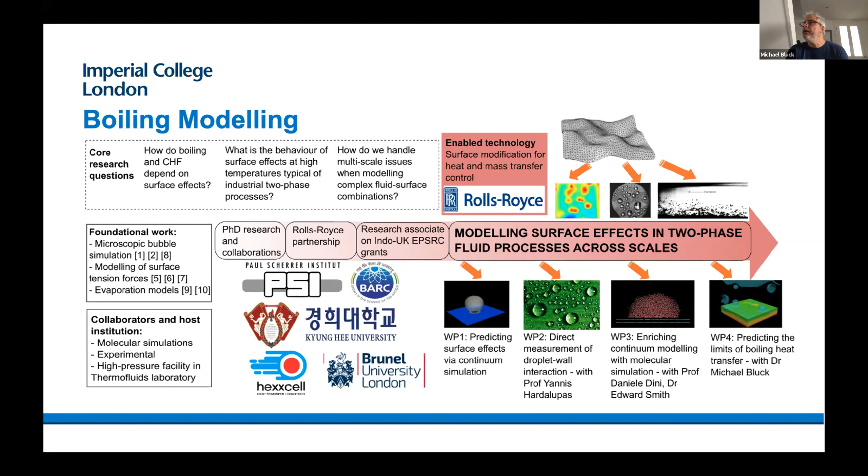So we're really coupling the materials almost with the fluid processes. So that's a big and growing area that builds on a lot of our boiling work that we've done over many years. UQ, uncertainty quantification, that's another big activity that covers quite a lot of what we're doing now and is growing.

Gaussian process regression methods, Bayesian calibration for determining constants. Whatever we're doing, certainly unless we're doing DNS, then constants are involved. So determining those and quantifying uncertainties in turbulence models, and a whole host of work involved in UQ. I'm only picking one or two of the things. I'm not going to go through a whole list.

Reduced order methods, again, if we haven't got vast supercomputing resources, then our approach, if you like, this side of the pond, is looking at reduced order methods, particularly POD-based methods, where we take full order models and we do a proper orthogonal decomposition to reduce the cost, with some limitations, obviously, and we've done a lot of work on that in collaboration with a group in Italy, Trieste.

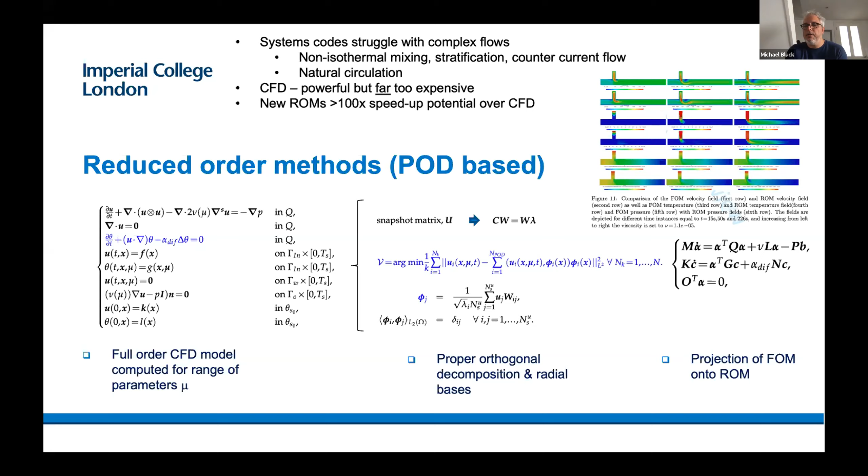And I think I'll end it there. There are obviously others, but I think 5 minutes. I think that'll do, if that's okay.

Yeah, thank you, Mike. Okay. Yeah, you can stop sharing. Then the next one can share his screen. The next one is Marco from Leeds University. Okay. Good morning, everyone. Let me share my screen. Can you see it? Yeah.

Okay. So we'll try to give a brief overview of the thermal hydraulics activity at the University of Leeds. First of all, that is part of the Nuclear Engineering Group, which is based in the School of Chemical and Process Engineering, but is a really multidisciplinary team that has expertise other than in thermal hydraulics, also in decommissioning, decontamination, waste management, and in advanced fuel cycles, and has been funded with several grants from the UK and also Europe, present and past.

So with regards to the thermal hydraulics activity, mostly we use computational fluid dynamics to advance our modeling capabilities in different aspects of nuclear thermal hydraulics, and our main expertise is in multi-phase flows, in particular gas-liquid, but also gas or liquid with solids, and specifically also on bubbly flows. And I will show some results on those. Then the other area in multi-phase flows we really focused on is boiling, and also we apply CFD to natural convection and passive safety systems in the context of nuclear thermal hydraulics.

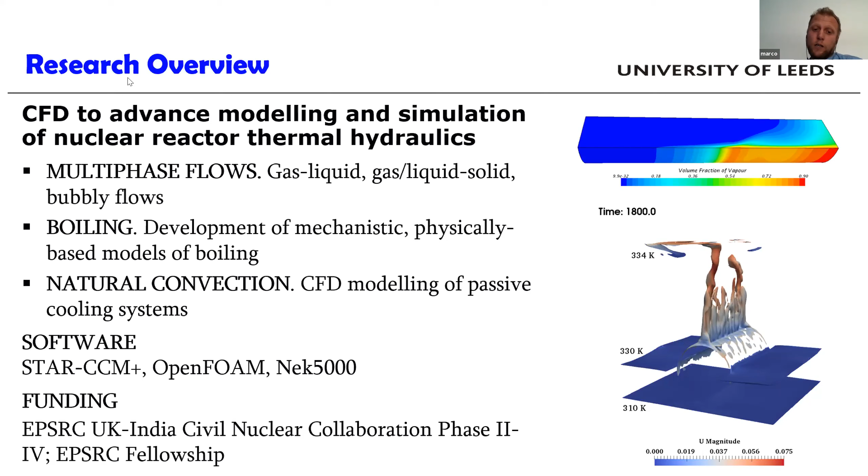The software we use are mainly STAR-CCM+, OpenFOAM and Nek5000. Those are the software we are experienced on, and the activities have been funded through different EPSRC grants, mainly on the UK-India civil nuclear collaboration, and also the fellowship that I currently hold.

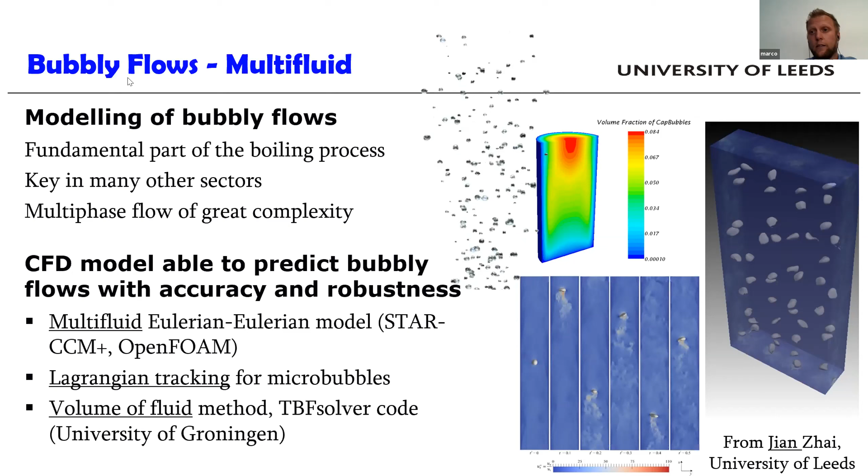So with regards to bubbly flows, we are interested in modeling those in the context of nuclear, because they are a fundamental part of the boiling process, but also because they are relevant in many other sectors where we require mixing, and that is also a fundamental part of some reprocessing techniques.

We use different techniques to model bubbly flows. We have capabilities with multi-fluid models, so Eulerian models, mainly using StarCCM+ and OpenFOAM, but also we use Lagrangian tracking, and this has been done mainly for microbubbles, and we are developing also capabilities in using interface resolving methods such as the volume of fluid, and you can see some example on the right of a single bubble rising in a channel, and also of some multiple bubbles simulation.

This is one of the recent developments. Also in the area of multi-phase gas liquid flows, the development of a generalized multi-phase model that is called GEMMA, that tries to go beyond the fact that in gas liquid flows we have multiple flow regimes, and most of the time the models at the present time are limited to some of those. So what we are trying to do is maintain the resolution of dispersed bubbles or droplets with average methods such as the multi-fluid. So it's a multi-fluid framework, and on top of those we have the resolution of the large interfaces only, more than resolution, let's say, keeping the interface sharp and trying to apply the right closure relation.

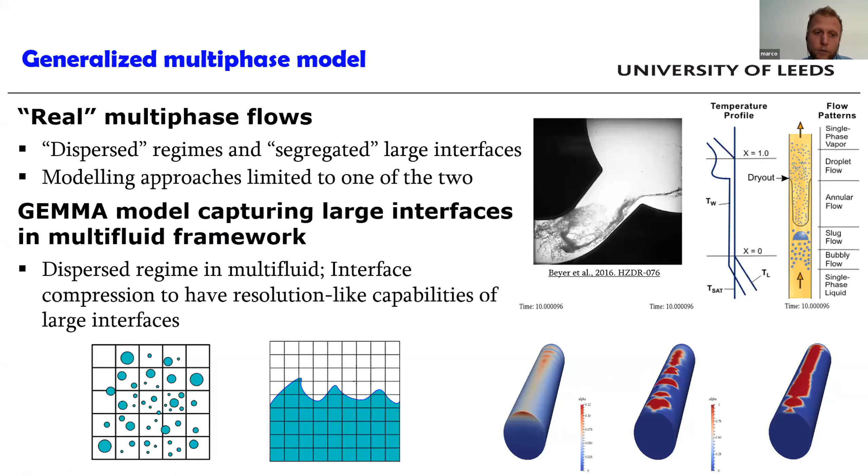Other than that, we had many activities in boiling. Again, the interest is, of course, the prediction of boiling heat transfer and the CHF in the reactors. What we do is we try to develop more physically based models of the boiling process, in particular for the growth of the bubble and the departure, and implement those in CFD, and have simulation of boiling flows in nuclear thermal hydraulics.

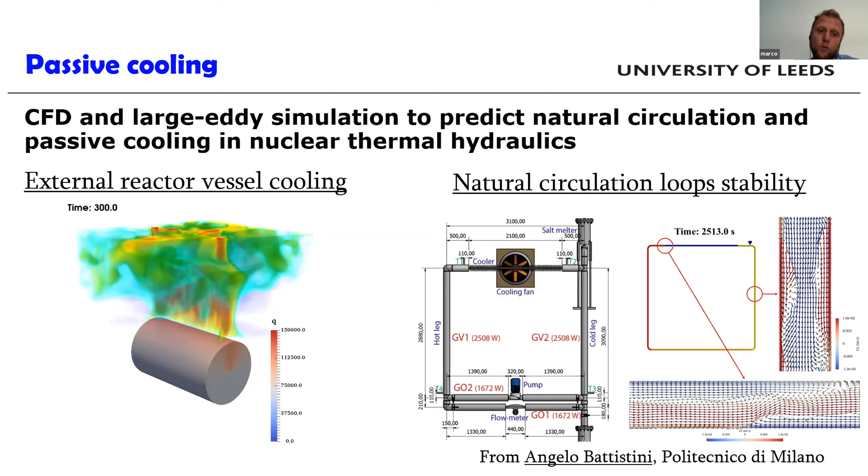Some of those are in natural circulation, and the other area we are active on is passive cooling. So the use of CFD, mainly coupled with large eddy simulation, to predict passive cooling and the effectiveness of passive cooling in nuclear reactors. You see two examples here, the cooling of the outside of a cylindrical vessel in a water pool in case of core melting, and also on the right, the simulation of a natural circulation loop with distributed heat generation. So here the focus is the molten salt reactor, again done with large eddy simulation. This is on the right, single phase instead. On the left, in the external reactor vessel, we also had some boiling on the outside surface.

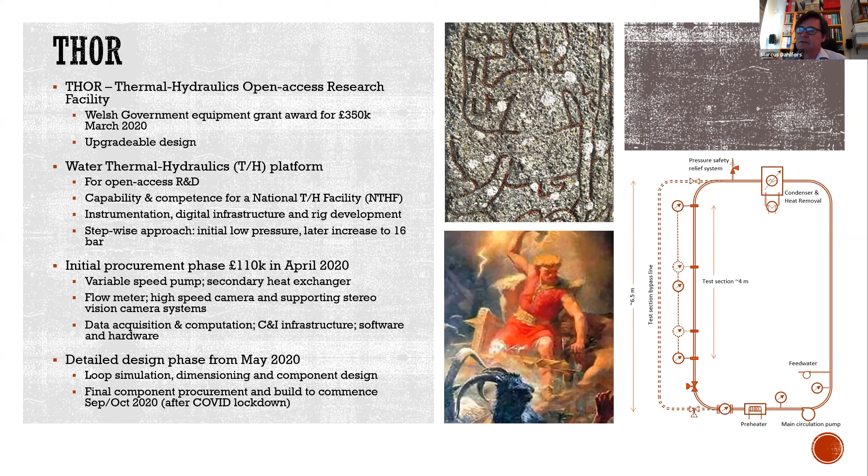But I want to turn my focus to a proposal due to the recent National Nuclear User Facility call, the phase 2A of it. We have developed an upgrade proposal. So Thunder, which is the Thermal Hydraulics Upgraded and Enhanced Research facility. This would basically build on a similar concept, but where we would take up pressure to 80 bar with a very special feature of a pressure chamber that can accommodate large window access to thermal hydraulics experiments inside of it.

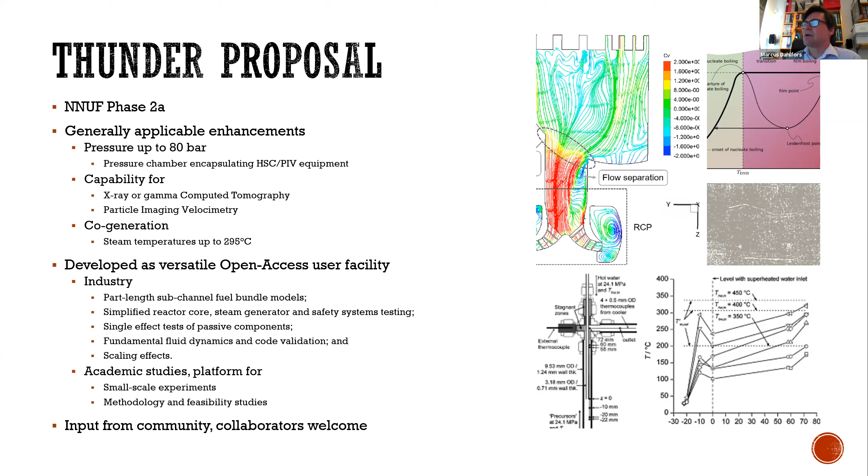For geometries of quite significant extent, we are looking to maybe a 2.5 meter high and 1.2 meter pressure vessel where we would have pressure equilibrium and therefore could run thin windows or thin wall geometries where you could apply CT techniques, computed tomography. At 80 bar, we would reach 295 degrees. I think you can figure out what kind of potential experiments you could do.

This is the basic scheme of the loop that we are proposing, and especially the system here with the pressure tank and the pressure equilibrium condenser is quite bespoke to this. It requires an inert atmosphere of nitrogen to be run. It has generated a bit of interest, and I've spoken to some people within the UKAEA SIG network who are also interested. There are also other complementary concepts out there for this call, and many look interesting, but this is ours, and if we're successful, we would obviously look for collaborators and people with suitable problems to test in this kind of facility.

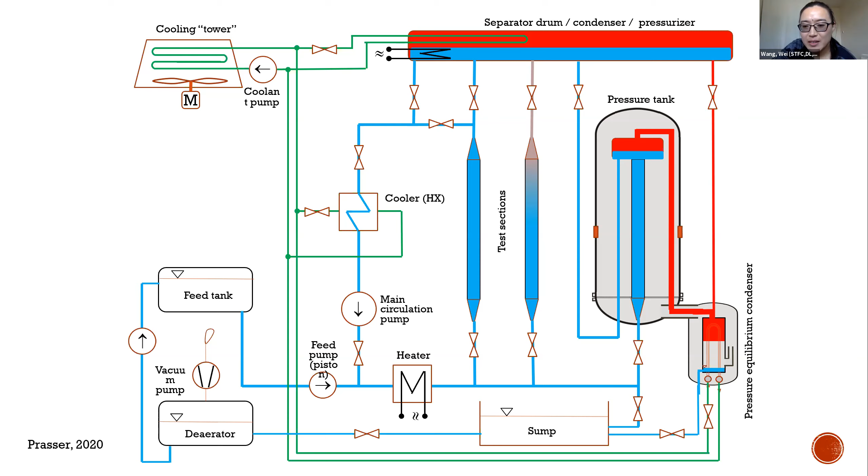How are we doing for time? Yeah, thank you. Thank you, Marcus. Okay, I'm happy with that. So if you have questions, don't hesitate to contact me later. Thank you. The next one is David Emerson from STFC Daresbury Laboratory. Marcus, can you stop sharing? Yes, I will. Just that my screen disappeared. There we go. Okay, thanks. That's fine.

Hi. Hopefully everybody can see that. Great. So I'm going to give a brief overview of the group. You've already heard from Wei about the CCP and some of the activities we're doing there around nuclear. So this is a little bit broader, around the department and some of the other work going on. We're part of the Computational Science and Engineering Division within the Scientific Computing Department. Within ours, we have four branches. We look after engineering, but we also have physics, biology, and chemistry.

All of these have a long history in CCP activity from different areas, but it gives an indication of the range of length scales that we cover, from electronic structure of matter in computational physics, lots of computational biology work that Wei has mentioned with BBSRC and MRC, and a very strong computational chemistry activity as well.

Now it only shows the first page. Okay, I have no idea why that is. It's showing full screen on mine. Maybe you have dual monitor. I can unplug the other monitor to see if that causes an issue. Can you see the second one? Yeah, I think that's okay. That's never happened before. Well, just very quickly, that's showing the various different activities. It's actually not showing very well on my screen now, which is interesting. I can only see a bit of my slide, but you can see all of it. We can show your current slide and your next one. What I'm going to do is just end it and start again, because I think it's got screwed up in a classic Windows way. Can you see it now? Yeah, that's the first page. Yeah, no, that's fine. Great, I don't know what happened there. It's never done that before in all the times I've used it.

So anyway, this is briefly going over again, just showing the length and time scales that we're operating over, from electronic structure right the way through to the macro scale, and the various sections.

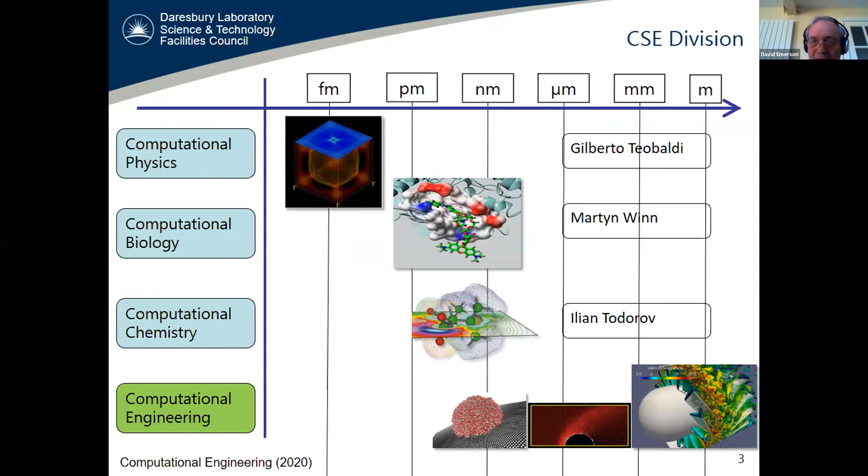These are the research topics that we're looking at. I've already run through them, but the main thing to focus on are the ones in red, which are the areas that we're working on quite extensively at the moment: Peta and exascale, and multi-physics and multi-scale.

This is just some examples of the projects we're doing. At the bottom right is part of an EPSRC project we had looking at molten salt fast reactors.

The top right is looking at coupling. In the coupling work, we've been developing the MUI - multiscale universal interface - which is a collaboration with Brown University in the US. This is an open source package for coupling based around the MPI directive, so it's very portable and easy to add to codes. There's still a lot of work to do on developing that coupling, but our intention is to use this so we can use the best code for a particular application and then couple them together.

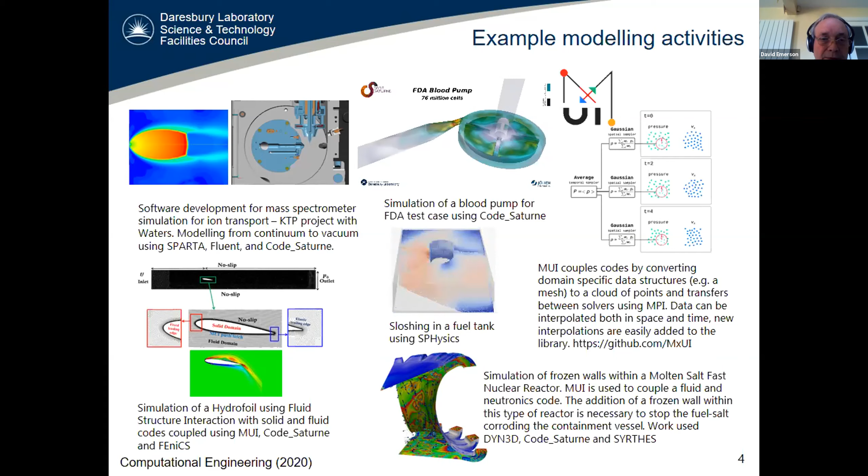Given that time is now a bit tight, I'll move on. The top left is a mass spectrometer project we were working on, a former project. There's also been some talk about fluid structure interaction, a project that just happened. So as sample projects, we have a program grant currently running.

This is looking at more nanoscale and microscale activities with Edinburgh and Warwick. There are three high-end computing consortia which are quite relevant to what we're doing here.

There's the UK Turbulence Consortium - we get a lot of our compute time within the consortium from UKTC. There's another one on turbulent reacting flows, and another looking at mesoscale modeling. Highlighted in red is the next machine, Archer 2, which I'll briefly touch on in the next slide to say what we're targeting. There are also three CCPs of relevance at the moment.

There's the nuclear thermal hydraulics, as we're at the meeting today. There's also a CCP in turbulence, looking at fundamental DNS. And there's a CCP in wave structure interaction, and part of the target there is to look at large-scale FSI type projects.

In terms of exascale, we are nowhere near as active in the UK as they are in the US. So we do have one called Excalibur, which is looking at coordinating the activities. There's a couple currently running, looking at turbulence and mesoscale modeling. One of our team, Alex Skillen and Charles Moulinec, have just had a project funded now looking at fluid structure interaction framework for exascale.

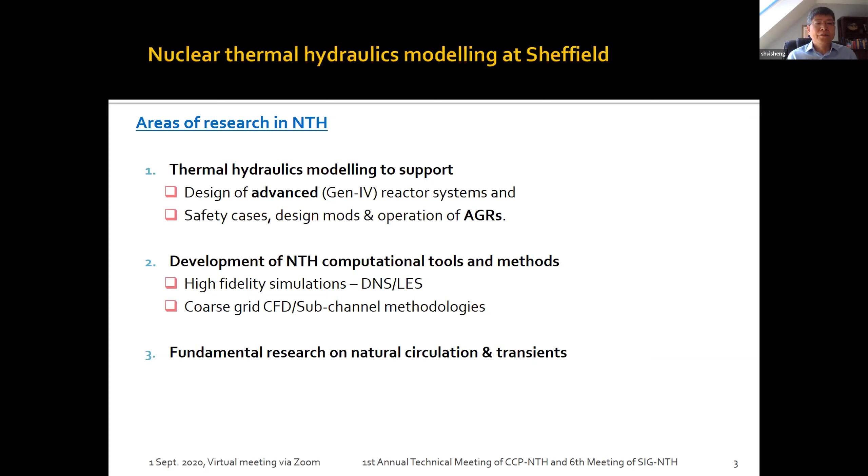So next, I'll just give you some examples of research projects currently happening within the research group in the department. The first one is on the modeling of advanced nuclear reactor designs. We're involved in 3 types of reactors: liquid metal fast reactors, SCWR (supercritical water-cooled reactors), and more recently high-temperature gas-cooled reactors.

Within the first group, we're involved in the BEIS digital reactor design thermal hydraulics, led by Frazer-Nash Consultancy. Here we've been working on aerosol dynamics in the cover gas region in liquid metal fast reactors, and more recently we focused on heat transfer to liquid metal in complex geometries, which will be discussed later on by Shuisheng.

And in the framework of the EPSRC and DOE project, we are working together with STFC and EDF Energy on safety model development and validation in the area of liquid metal fast reactors, to support activities in instrumentation technology development in the US.

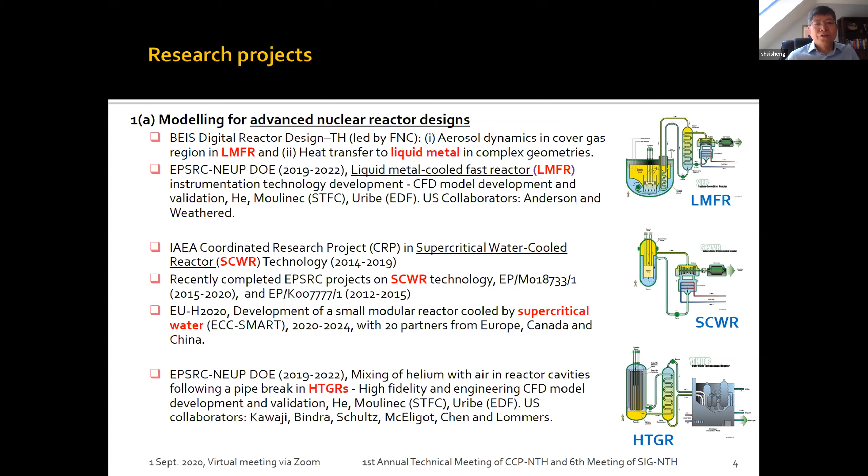Now, in the AGRs, we've been working on fuel route modeling. There are a couple of PhD scholarships which enable us to develop something quite interesting. And then in terms of the core reactor heat transfer, is something I started with, so we've been probably working with that group for over 10 years.

Then the last one, we talk about safety case. This particular one is a recent safety case which we have done a bit of work to support.

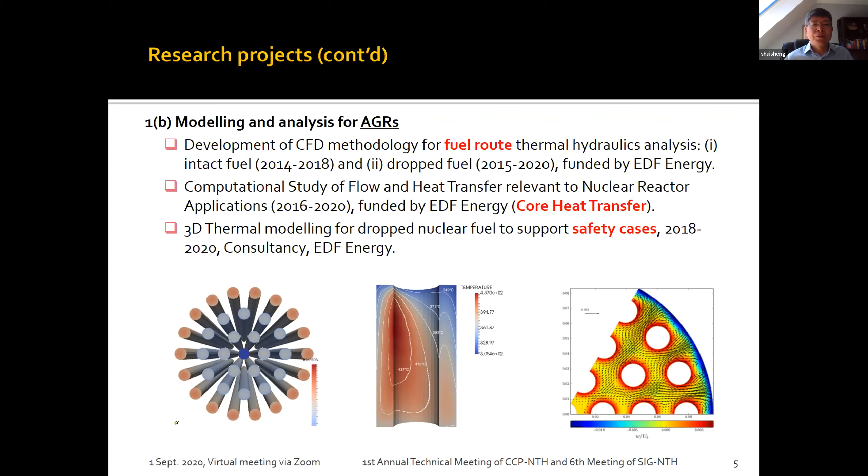This is in the area of 3D thermal modeling. But in the past, we supported various safety case development.

Now, in the area of computational tools and methodology development, as a group, we have developed a number of safety software codes, and probably that's what we want to do.

That also includes Chapsim for DNS, and obviously the main developers are Mehdi Seddighi, who is currently at Liverpool University, and also Dr. Wei Wang, currently at STFC.

And in the second item, we actually developed a 3D porous medium model called Freedom for AGR fuel bundles.

This is something we hope to use to support all the safety cases related to natural circulation, both in terms of intact fuel and dropped fuel scenarios.

And the third item on this is a development of a novel sub-channel CFD modeling methodology. This is funded by BEIS Digital Reactor Thermo Hydraulics, again led by Frazer-Nash.

And again, this will be discussed by Dr. Bo Liu in the afternoon.

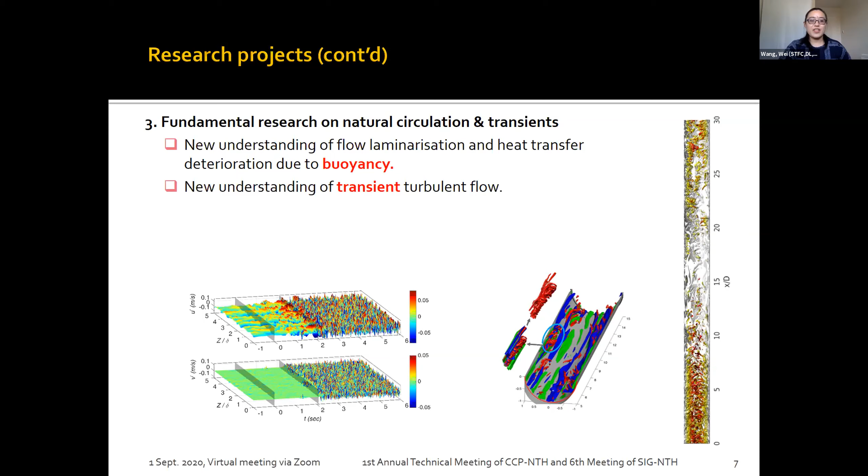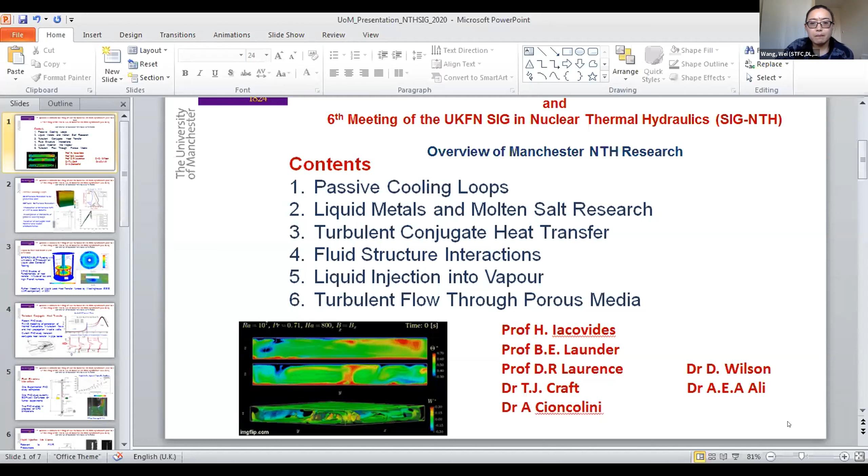Okay, can everyone see the full screen? Yes.

Okay, hello again. Over the next few minutes, I'll try and give an overview of some of the current and also recently completed research in the area of thermal hydraulics within our group.

Here, I have the names of the academics and PDRAs that currently work in this area within the group.

I should perhaps also add that at Manchester, we also have the Modeling and Simulation Center set up by EDF Energy and now being joined by other external collaborators.

We also have the Dalton Nuclear Institute, which provides and supports nuclear research right across the different disciplines. And also, jointly with Imperial College, we are a Rolls-Royce nuclear research center.

Here, I'll just quickly go through some of this list of items. It is actually by no means exhaustive.

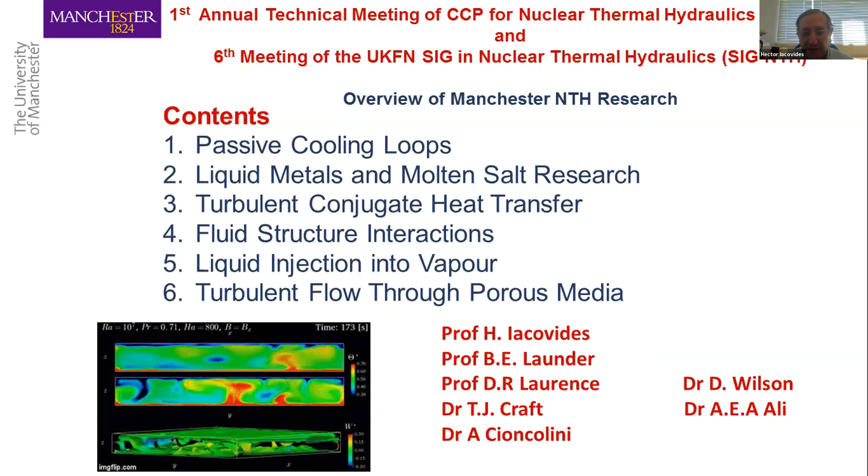I just realized, for example, that I left out some of the experimental research that my colleague Andrea Cioncolini has underway on boiling, but this will give you a flavor of what we are up to.

Passive cooling loops is an area we are quite active in. We have funding from BEIS through the BEIS Friends and Arch project, which Dr. Wilson will be

discussing further later on. We also have another PhD studentship co-funded by EDF and the University of Manchester, who will look at more fundamental aspects, starting with more fundamental natural convection flows, where the student introduced the analytical wall function

into Code Saturne, which, as you can see here, has quite a big impact on the accuracy.

He's also now looking at some of these natural convection loops, and in particular, focusing on the transients and how that can be improved by including conjugate heat transfer and also the characteristics of the heater.

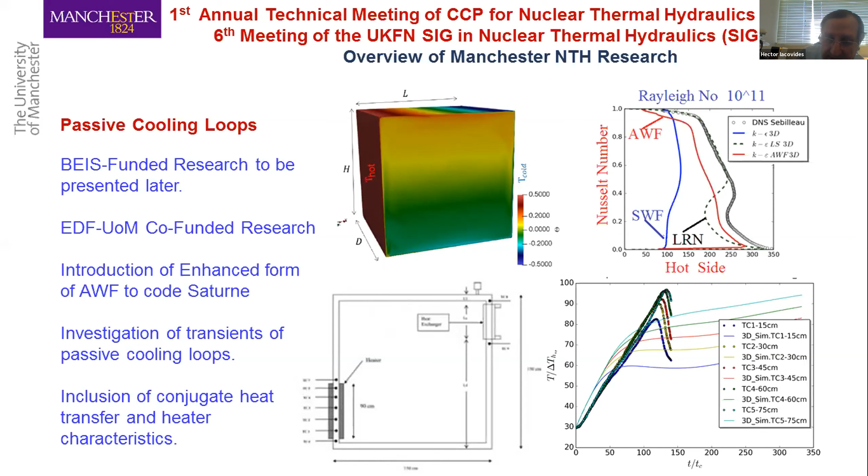Another area that we started working a lot on recently is liquid metals and molten salt research. Funding is mainly provided by the joint EPSRC and DOE grant, jointly with the University of Pittsburgh.

Here are some examples of some of the initial work we're doing to provide information to our Pittsburgh colleagues on how to design a molten lead corrosion experimental rig.

Then we'll go on to produce some high fidelity simulations of this in order to compare with their experimental data.

In parallel to that, we also have two PhD studies looking at fundamental aspects of low Prandtl and high Prandtl number heat transfer. And later on in 2021, we will start another project funded by Westinghouse through the BEIS AMR competition on

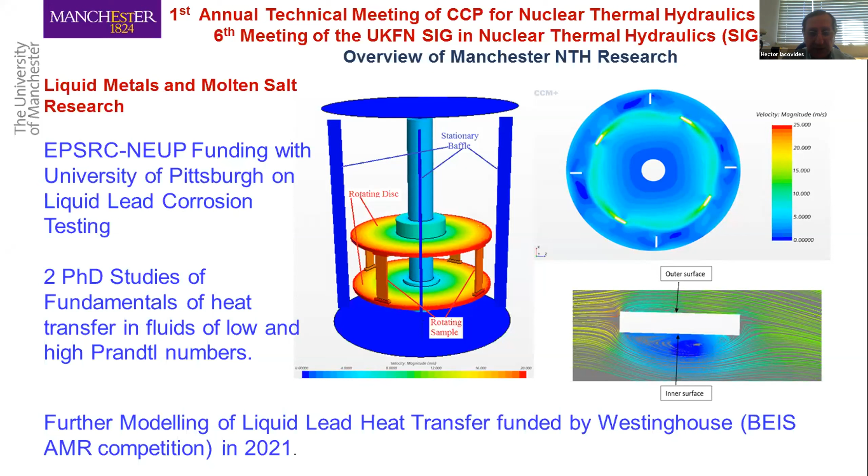liquid lead heat transfer as well.

Another area is that of conjugate heat transfer. We recently completed a PhD study in which we've been looking at the generation of thermal fluctuations due to turbulence within the flow and how they propagate into solid walls.

Initially looking at simple channel flows and comparing with DNS data. Having developed the model, more recently, we applied that to these more complex 3D cases for which there is also DNS data.

And as you can see here, it seems to be providing pretty close agreement with the DNS.

More recently, we started another PhD study looking at transient conjugate heat transfer through pipe bends.

Another area is other fluid structural interactions. What I show here is from an earlier PhD study that has been completed.

We now have another experimental PhD study co-funded by EDF and the University of Manchester. In parallel to that, we have another two PhD studies looking into developing CFD modeling for these cases where we have flow-induced vibrations when the flow is parallel to the rod, which is relevant to PWR fuel passages.

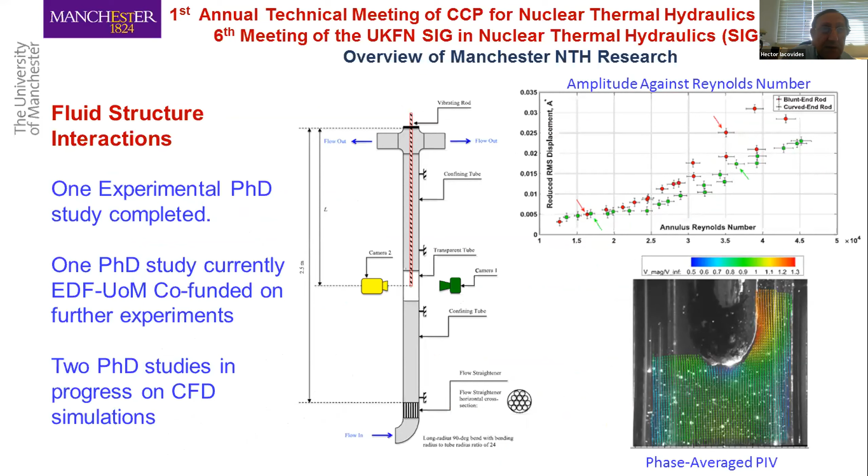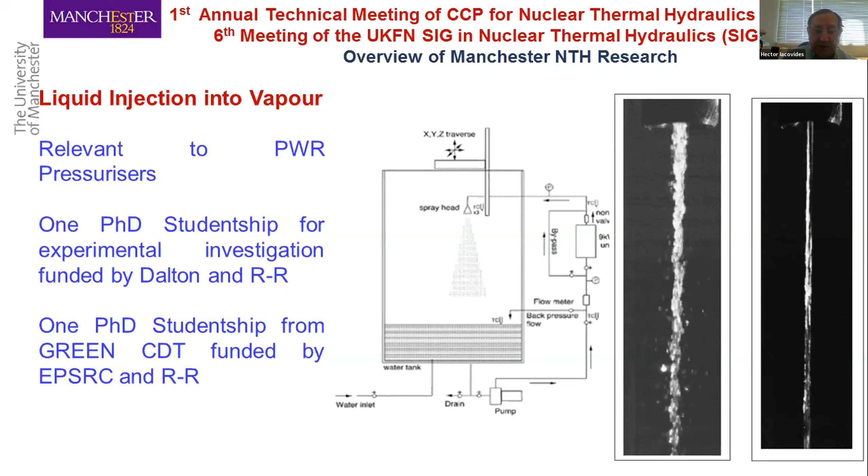That is funded jointly by Dalton and Rolls-Royce. We also have another PhD studentship from the Green CDT, co-funded by EPSRC and Rolls-Royce, looking to develop CFD models for these cases and use experiments for validation.

In parallel to that, we had another PhD study looking at the turbulence modeling of such flows, especially at improving and developing models that handle the turbulence around the interface between the fluid and the porous regions.

And I suspect that's my last one. So hopefully I managed to give you a quick overview within a reasonable time. Clearly there is a lot more to be said about those, but that's perhaps for another day. Thank you.

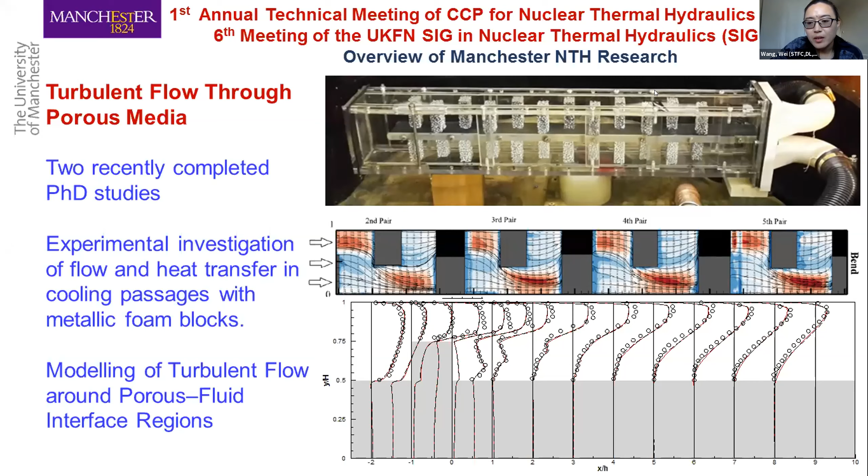Thank you, Hector. The next one is Christos from Imperial College, London.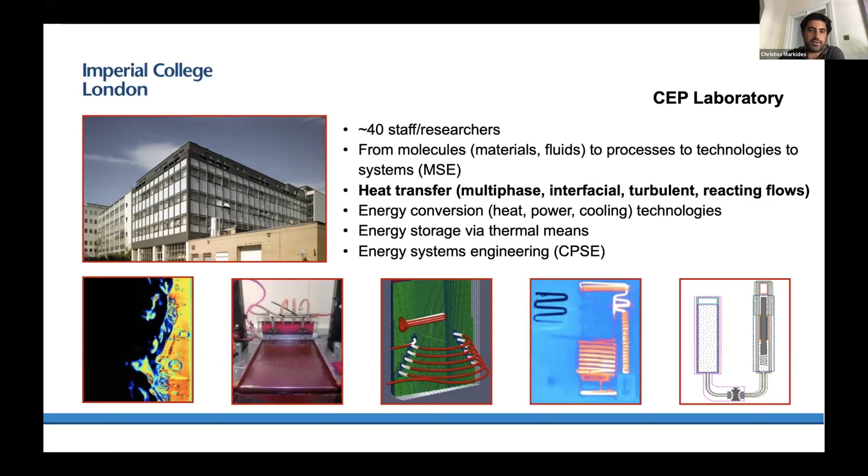In our group, this is the size of the group, and we tend to do work that goes all the way from processes - heat transfer, mass transfer processes - up to technologies, devices, and systems. I won't really talk to you about everything, but I'm going to focus basically on the red bit for this particular presentation.

Being experimentalists, I suspect that the most useful thing we could do for people who are on the call today is provide high quality experimental data for model development and validation. So I'm going to be focusing on the work we've done on the bottom half of this slide.

Okay, so in our department, and I'm speaking also here on behalf of my colleague, we've done some work a few years back starting from fluoride salt cooled reactors, and also we developed an interest generally in molten salts as heat transfer fluids for nuclear applications and nuclear reactors. This was an interest of Geoff Hewitt's, and we had a couple of PhD students that were funded through the CNE, the Centre for Nuclear Engineering at Imperial College.

But I think really the core of what I'm going to speak about today is the second bullet point, although I will say a few things about the first one. I'm basically going to present to you some experimental capabilities which we're quite keen to apply to flows which are of relevance for model development.

We do a lot of work on what happens to heat recovery, utilization, power cycles, and whole system analysis. It's out of scope of the discussion, but I think it's useful that people on the call know that there are some people trying to include the role of nuclear energy in the UK in a more whole energy system modeling sense.

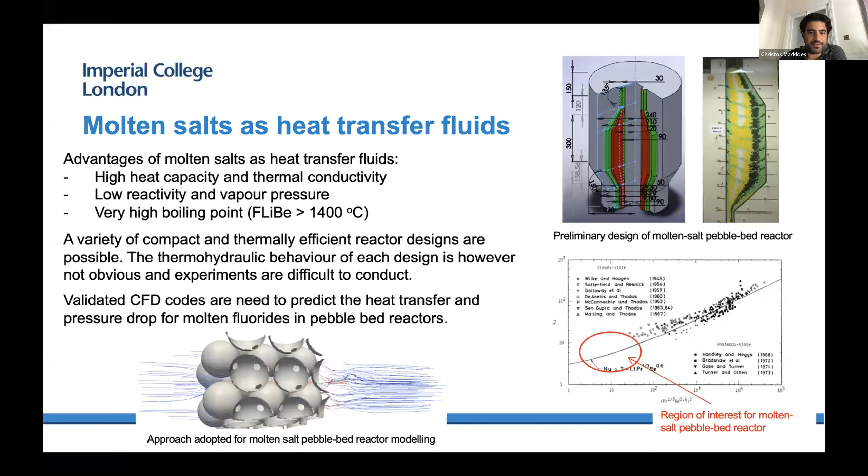We very quickly discovered that when you're doing CFD, you're just entering thermophysical property values, which is a little bit of a black magic. So there was a lot of work, a whole PhD went into measuring thermophysical properties of molten salts outside of the ranges where data can actually be found in the literature.

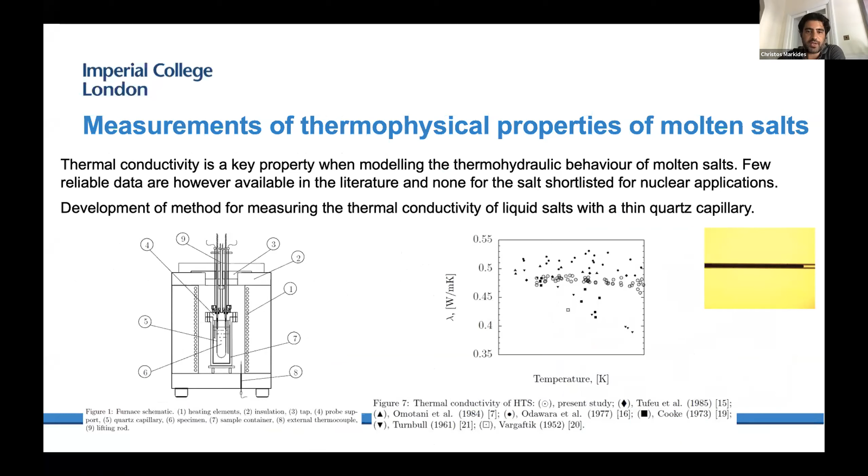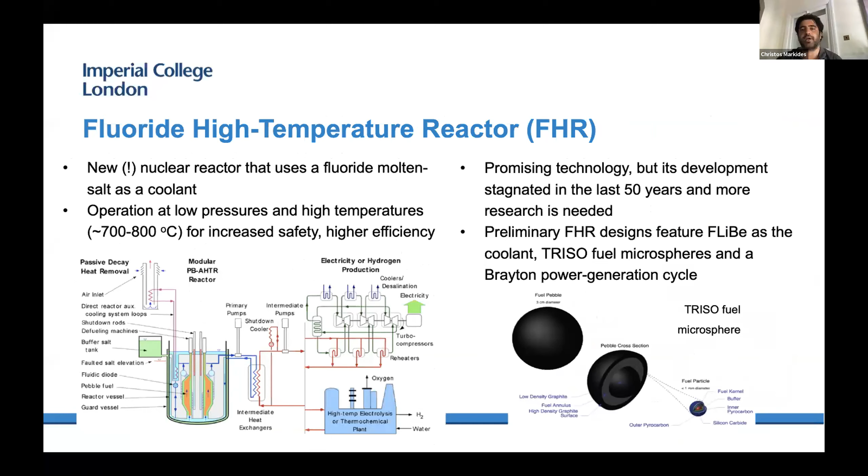We then went up to the level of considering the reactor, power cycle, and the whole plant. So trying to optimize the plant, there's an interest there, and trying to design a DRACS system, which is basically a passive cooling system for these types of and other types of reactors. We found some interesting results—this is published data on how in some cases you can have freezing of the salts in these types of heat exchangers, which is basically very bad news if you're trying to design something that's passively safe.

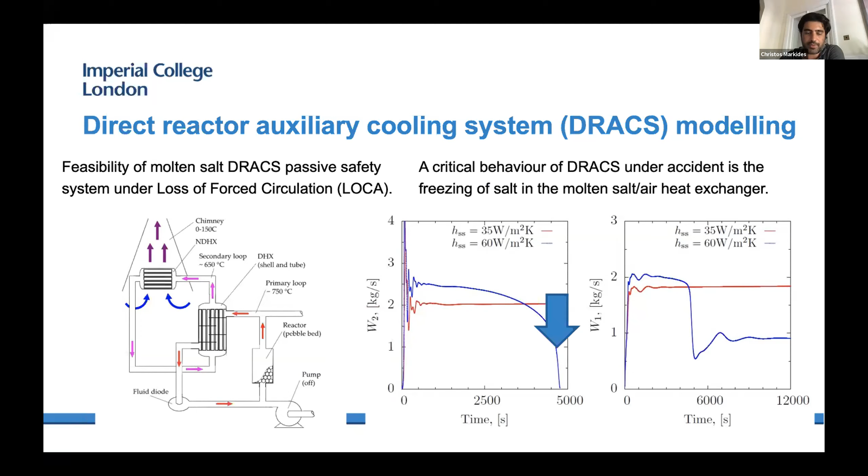Okay, let's go into the main thrust, which would be of interest to the people here. In my group, we specialize a lot on interfacial flows, two-phase flows, typically gas-liquid or liquid-liquid, where the two liquid phases are immiscible, also solid-liquid, solid-gas. Most of what I'll show are liquid-gas, but there are other types of flows, and we do a very wide range of measurements.

If you have a two-phase system—here I'm showing the example of a liquid-gas system—optical measurements which are required to perform things like PIV in single-phase flows become much more difficult, because of course you have distortions wherever you have the interface, you have reflections, you have refraction of light, and so on.

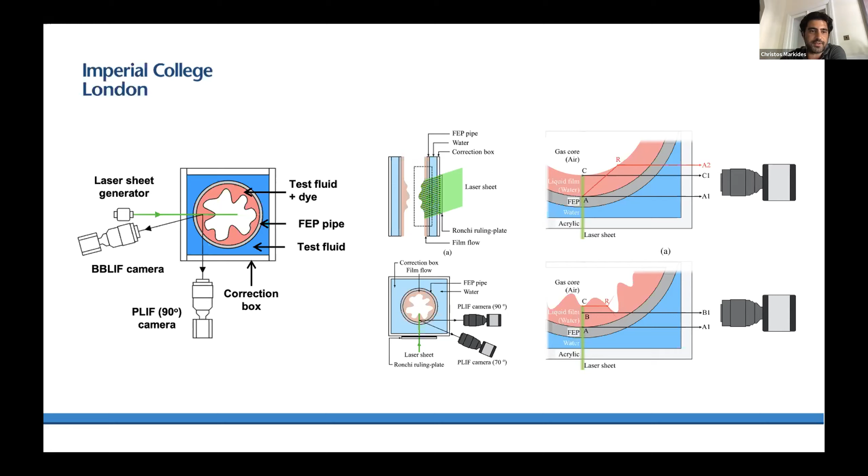We've spent a good 10, 12 years since I joined the department basically developing techniques that allow you to do measurements in these types of flows, and to measure velocities, etc., and interfacial locations, which gives you a sort of phase distribution, with different techniques.

Here I'm just showing one particular case where we're trying to measure or identify the free surface of a film, where you can see that the true surface of the film is actually hard to get. So we have techniques which allow you to find the real location of the film. Everything above this red line—I don't know if you can see my cursor—this is called the false interface. There's no real liquid phase over here; the liquid phase is only below the red line.

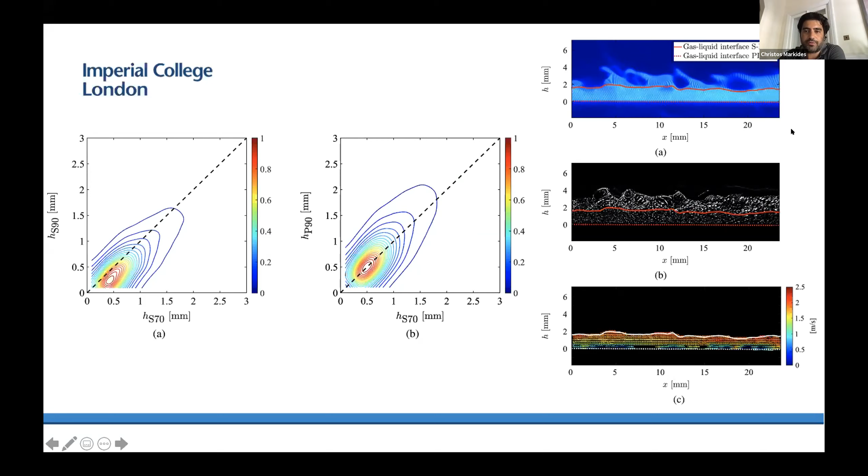I think really the main point here is that when you're trying to do measurements in two-phase flows and in boiling flows, which I'm going to get to in a second, you need very dedicated experimental techniques, and we've been trying to develop this for a number of years.

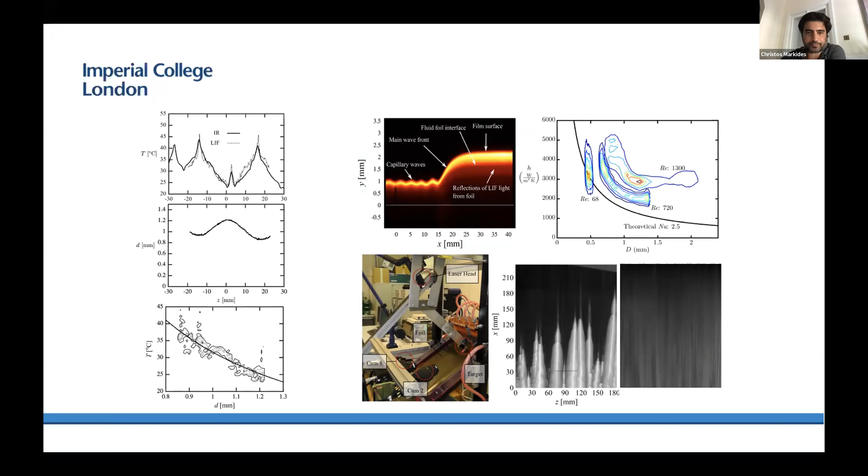And then effectively taking these types of techniques and trying to look at a much more complicated flow—so this is boiling, right, pool boiling, and this collaboration with Matteo Bucci at MIT. This is actually work that was done at MIT in the nuclear department there, in terms of applying techniques that we brought. I'm going to show a few typical examples of the type of information we're trying to get to with these measurements.

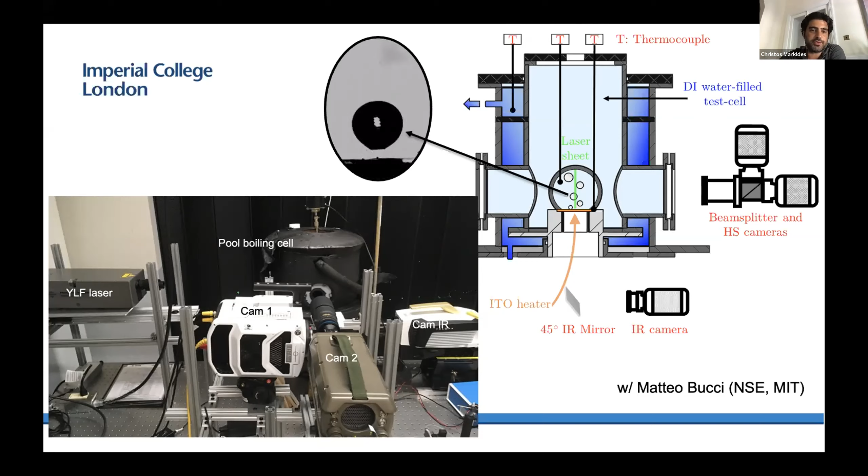Okay, so I think that really summarizes what we've been trying to do and what are our next steps. As I said, most of our experiments are large-scale experiments. We're trying to go not just in terms of the size of the channel, but also potentially the measurement domain towards smaller domains. So we've got a microscopy system that we're building up at the moment, and we also have an EPSRC funded grant on small channels that we want to start applying these techniques to, and we're sticking with boiling. So we're talking about two-phase flows.

We also have a Marie Curie fellow arriving in October, November, interested in doing measurements in CO2 at supercritical conditions with heat transfer. And then you have buoyancy effects and a lot of difficulties, again, making measurements. We want to look at work that Matteo does at MIT on surface engineering, nanoengineering, and to what extent you can affect things like the heat transfer performance through these types of modifying surfaces. But also personally, I have an interest in the interface. So, whether through particles or other types of...

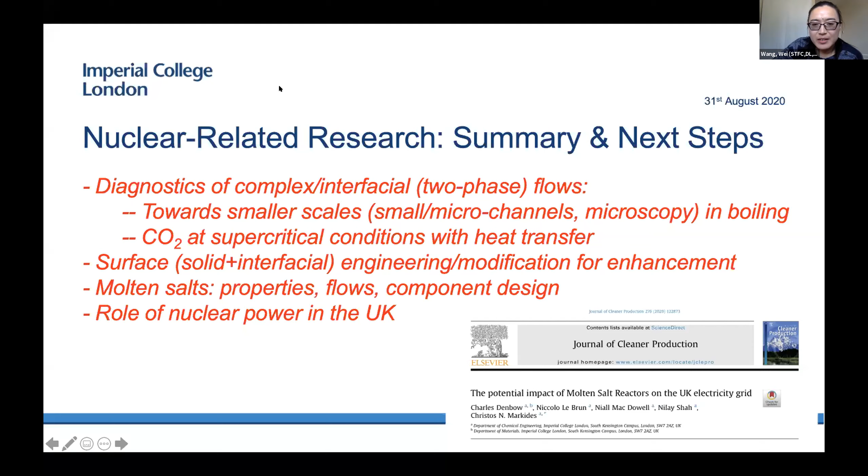Right, let me see if I could share my screen. Is it all right? Can you see it? Yes. All right, brilliant. Thank you, Wei. And I think it's time to say good afternoon.

So good afternoon, everyone. I'm going to briefly give a very short summary of what we are doing related to thermal hydraulics. It is mainly some recent and current fundamental research that we are doing. Part of the work was done when I was working with Shuisheng in Sheffield, I'm working with him on some projects, and some others with other collaborators. There are a couple of researchers who are mainly doing research on this.

The first topic is on turbulence when we have non-periodic flow. So we have one turbulent state, and at some point we accelerate or decelerate to another turbulent state, and there is a time following that acceleration or deceleration that we call the transient period. During that period, the flow changes to reach the new turbulent state. We have done research on smooth surfaces and rough surfaces for this type of flow.

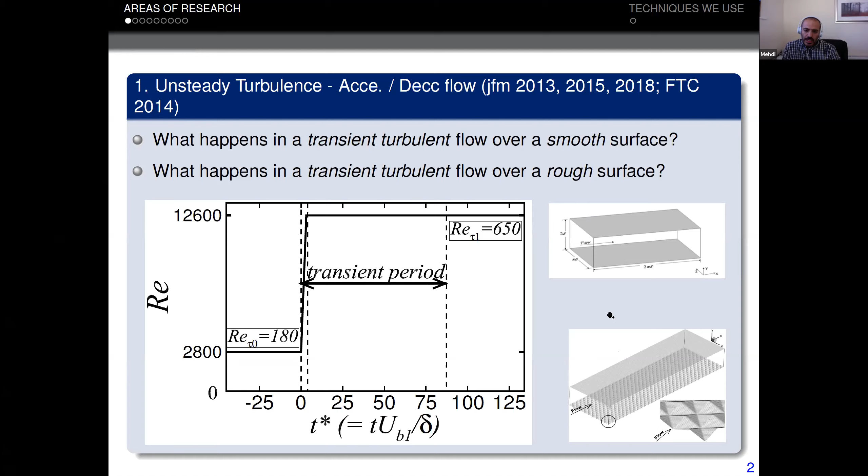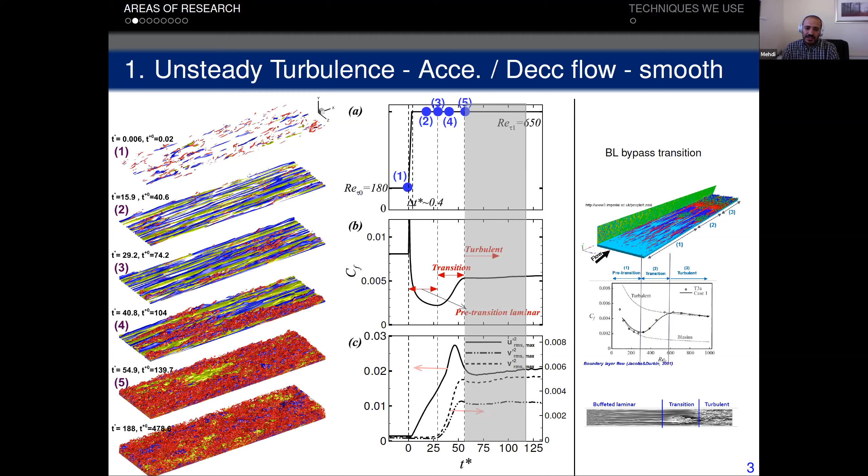For the case of a smooth surface, despite the initial state being turbulent, the flow has shown a laminar to turbulent transition, a process which resembles what we see in bypass transition. There's lots of details on that. We have shown that three states of pre-transition, transition, and turbulence are exhibited by the flow following that acceleration. Again, this is despite the fact that the initial state of the flow is turbulent.

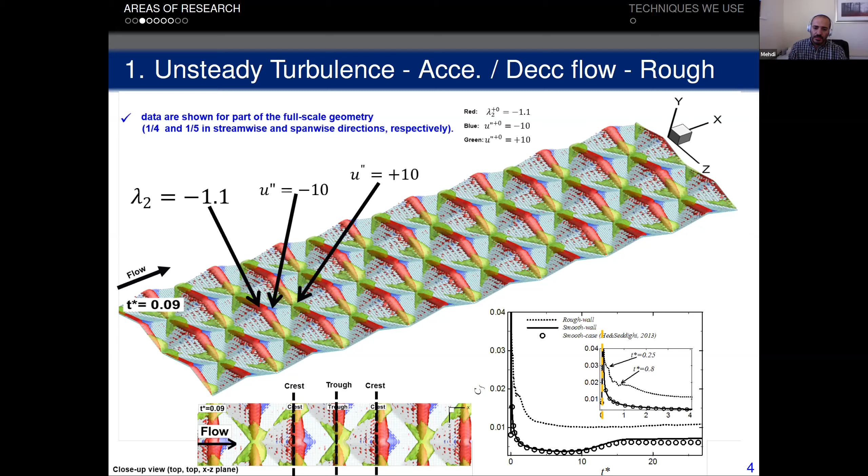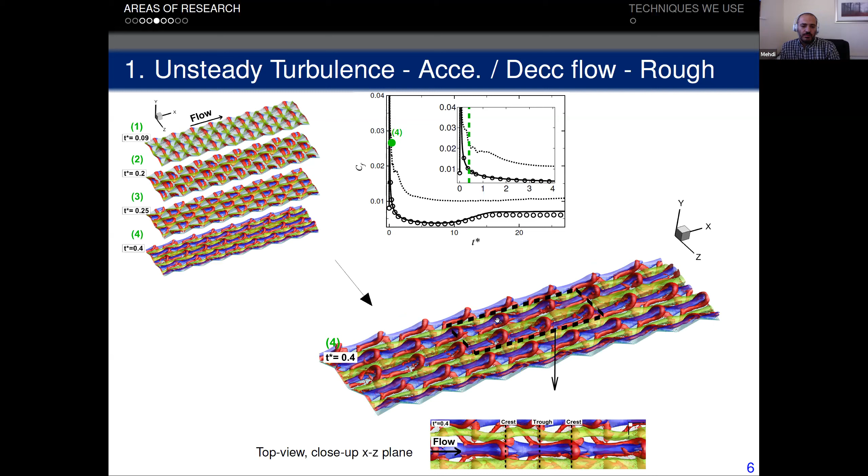We also did research on a rough surface, where the roughness is modeled using a simplistic pyramid roughness. Again, the initial flow state was turbulent, although quite low in terms of the roughness definition, near the hydraulically smooth region, and then we accelerated the flow to a nearly fully rough regime. Again, we can see similar behavior for the development of turbulence, which resembles roughness-induced transition.

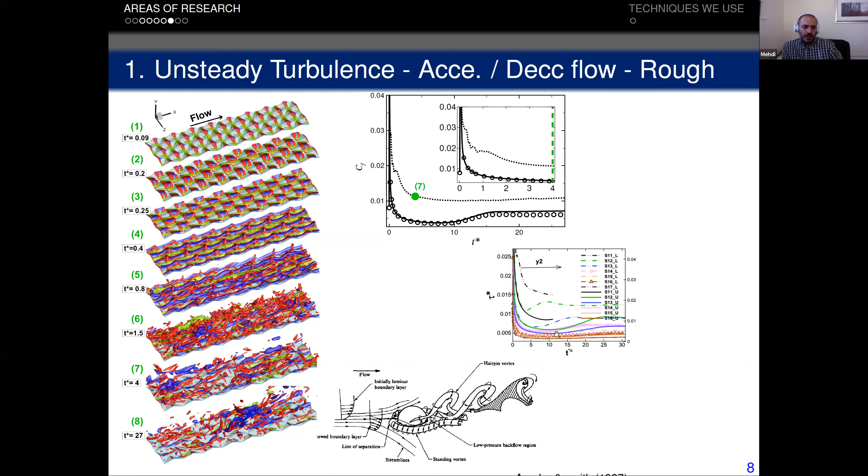So in addition to that, all of these are for turbulence when we have acceleration or deceleration individually. And obviously we have done that for some other flow conditions, not only towards the fully rough regime. Within the transitional rough regime, there is also some research we have done.

And the other type of research study that we have just started together with STFC, Charles Moulinec, is to look at pulsating flow. Again, in pulsating flow, there are lots of literatures already, but there are some contradicting sort of things presented in terms of how pulsatile flow affects the heat transfer as well as flow-only cases. In some cases, they showed enhanced heat transfer. In some cases, it's suppressing the heat transfer.

So we are looking at that to understand detailed flow structure and flow and heat transfer performance when we have pulsatile flow. In terms of the computational and the code development part, we also look at some modification to CHAPSim that I'm sure you're already probably aware of, a few times by Wei and Shuisheng, that for parallelization, Wei has already started that. And some other aspects of the code development that we are going to contribute to is to look at, to improve the

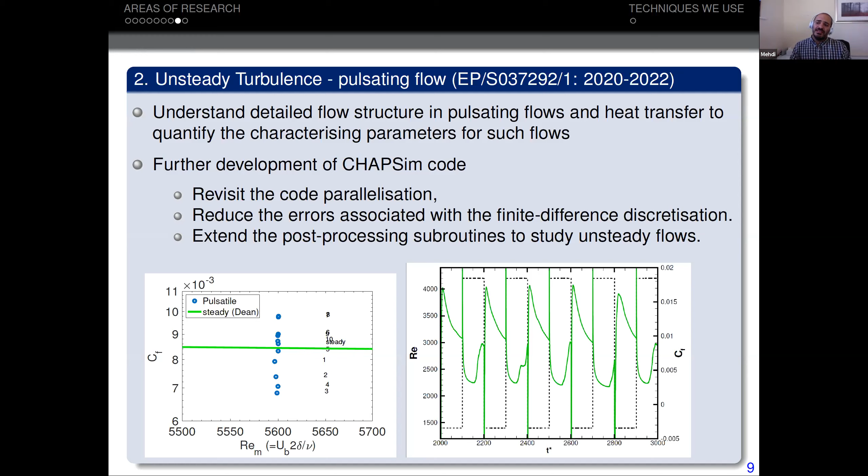spatial discretization error. And also we got quite many post-processing subroutines, as Wei mentioned earlier, developed by different users, but we are going to combine them and make them in one subroutine. In particular, the main focus is to look at the unsteady flow. And when I say unsteady, I mean changing mean flow, not instantaneous, which is obviously changing. Again, in terms of drag reduction, some studies have shown for some particular amplitude and period, we see some drag reduction. But again, this is something that we're going to look at.

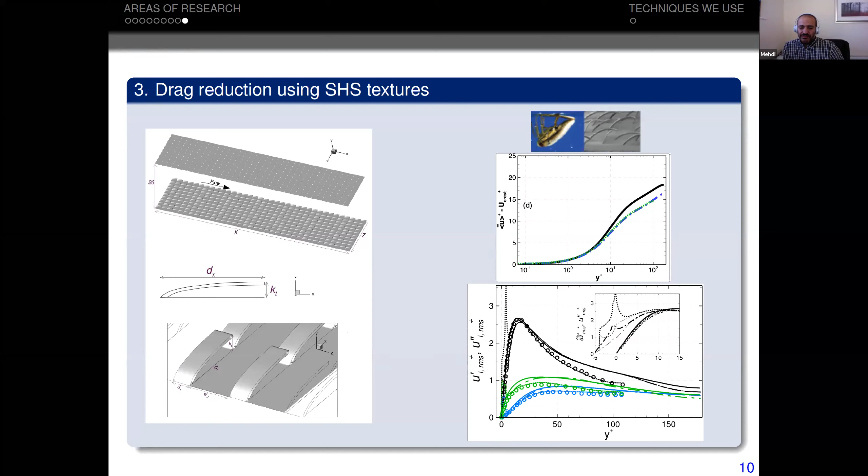Yeah, in terms of the methodology, I think I don't need to explain that much. Wei has already indicated that we use CHAPSim, and it is now for more than a decade under development by different people, and we are also aiming to improve it more and more over this CCP project, as well as this EPSRC project that is working on the pulsating flow.

Another recently completed project that required several different angles of expertise is a molten salt reactor, more in particular Moltex's version of it. Some of you may be familiar. So this is a concept that uses molten salt as fuel, which is encased in relatively thick fuel pins, and clean salt as a coolant, which removes

the heat. So the trade-off that we were trying to evaluate was, some of you may know that Moltex is designed as a burner reactor. We're trying to see whether it can be a breeder reactor. So we want to try to breed actinides and improve fuel utilization. So it was apparent from the beginning that it should come at some cost of achievable power density, which is the main driver of economics of the reactor. So this breeding potential versus power density was a very interesting exercise, which required a wide range of models to work together through coupled interfaces.

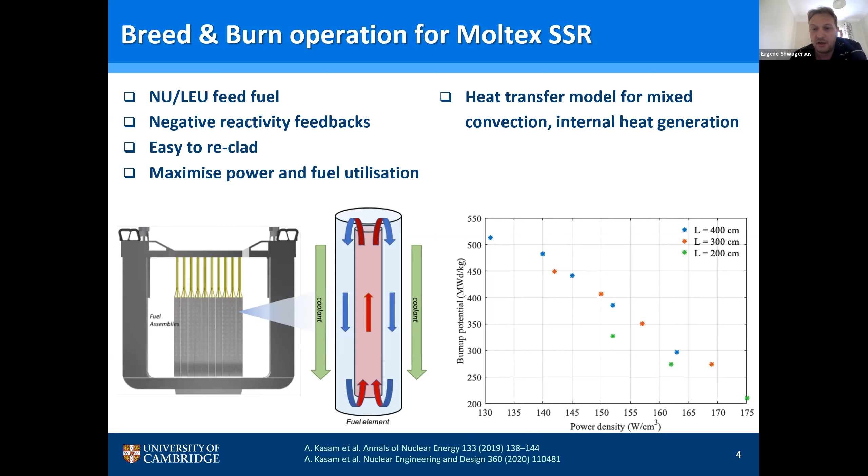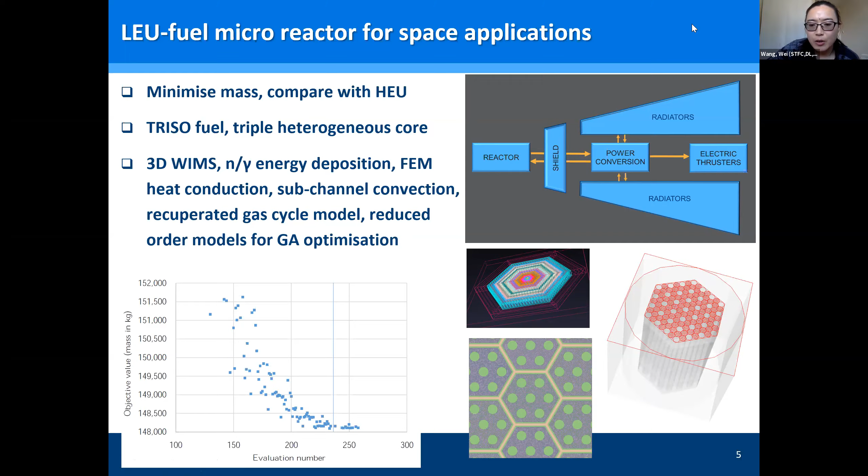Okay, thanks everyone. So my name is Chris Harrington from UKAEA. This talk is a bit of an overview. It's quite broad and not too detailed on our interests at UKAEA. Our mission is to realize fusion power, but in doing so, explore enabling technologies, of which thermal hydraulics is obviously a big one. So there's strong overlaps with fission, but also some quite unique challenges as well. So I'm going to start just by going through the basics of a fusion reactor. A lot of you probably already know a lot of this, but I don't like to presume. This is taking the EU DEMO project as an example.

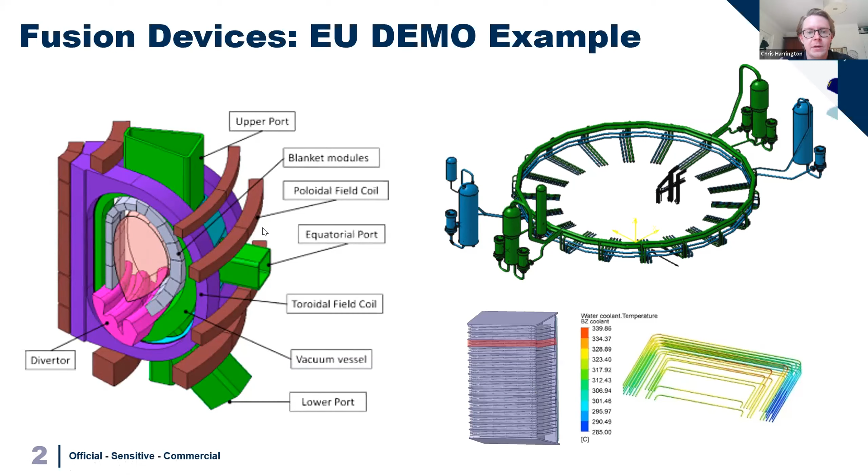So in terms of our aims at UKAEA, what we're looking to do is develop the capability in both simulation and testing of components for virtual engineering and the operation of some of our facilities. The big one that I'll come on to in a bit is called Chimera. And we want to do this collaborating extensively with other parties, universities, industry groups, and so on.

We're aware that there's a lot of excellent expertise out there amongst a lot of the people on this call. So really we want to work with others where we can, and hopefully the CCP is a prime opportunity to do that.

In terms of particular needs, we need to bridge the gap with plant level simulations. So that's what I'm talking about when I talk about that larger loop, but also breaking down the simulations into more detailed simulations of the blanket.

We need to be able to explore different designs of components, often with challenging geometries. So that water-cooled blanket that I showed you is just one design. There could be many others involving fuel pin type arrangements or pebble beds. And then even within that, there's optimization to be done in terms of geometries, sizes, and so on.

We need to be able to do all of that design work, and we also need to verify the performance of existing designs. So that involves putting them under test conditions where we can.

A lot of the methods that we have at the moment at UKAEA, we have a reasonable base in thermal hydraulics. It tends to be a little bit in pockets around the organization, and we tend to use either system codes or quite industry standard CFD tools such as ANSYS Fluent. A lot of these are okay, but really we need to take that to the next level.

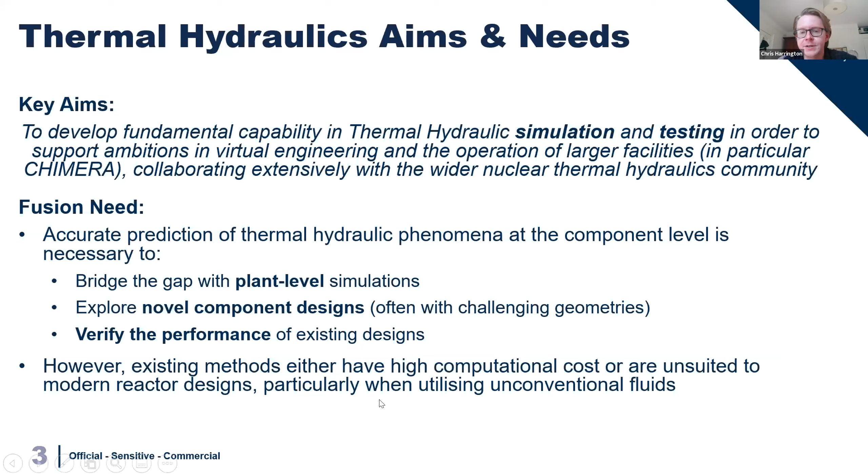And that's what we're aiming to do over the next few years. Our priority areas are listed here on the left.

So that involves a robust and high fidelity CFD, where I've pinched those words from the CCP because it very much is about that. But specifically we need to be looking at water, liquid metals, potentially molten salts, supercritical fluids—the whole range of possible fluids that could realize a fusion reactor.

We need to exploit high performance computing and parameterized workflows so that we can come up with designs of different in-vessel components, but also tweak those designs and optimize them as far as possible to improve the heat transfer.

We need to be able to capture complex phenomena, so that might include natural or at least mixed convection, conjugate heat transfer, and high and low Prandtl number flows, particularly relating to molten salts or liquid metal usage, which might be very enabling for a fusion power plant.

And that last point there is about linking all of these things together: MHD effects if we're talking about liquid metals in magnetic fields, neutronic simulations, and going from the system code to the CFD level where we need to if we want to simulate the entire plant. Some particular projects are listed there on the right.

So prediction and verification of components in Chimera. This is a facility I'll talk to you about in just a second. It's for applying blanket type components to expected loads so that we can characterize the performance.

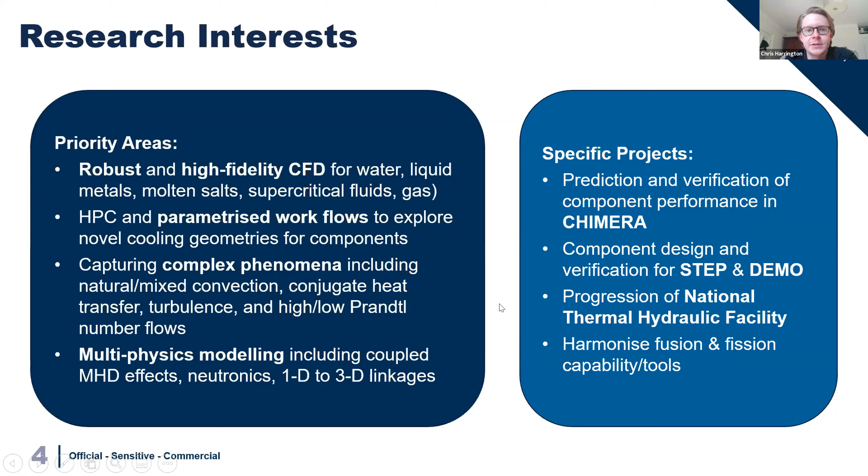The idea of this facility, we're looking to house a new thermal hydraulic group up there. That will bring together a lot of our capability that we have at the moment under one roof. In particular, this building will host our Chimera experiment.

Chimera is for taking a component scale blanket module and applying heat loads, magnetic fields to that module with instrumentation so that we can both simulate and characterize its performance and validate that performance. Here's a quick little mock-up of how that will look.

It is... Sorry, Chris, time runs out. Okay, this is my last slide, so I'll just skip through this quickly.

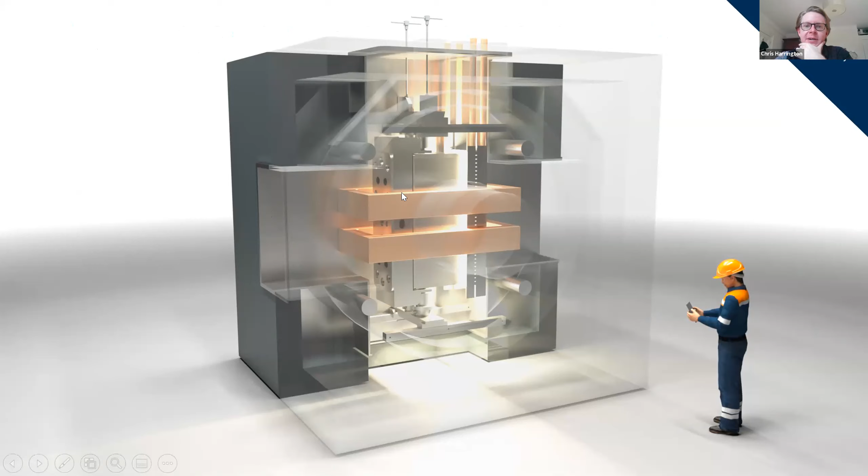There's a blanket module in this central position, and around that there are magnets supplying high magnetic fields, and there's cooling coming in at the top, and there's a heat load being applied to the front of this. So these are all magnets and a vacuum vessel that houses it. It's about 1 meter in scale.

So this is a serious piece of engineering, high heat loads, high magnetic fields, high pressure water, high temperatures that we'll be able to simulate in this facility. And we're looking for ways to characterize that flow and validate it against our models as well. So that's quite an exciting time.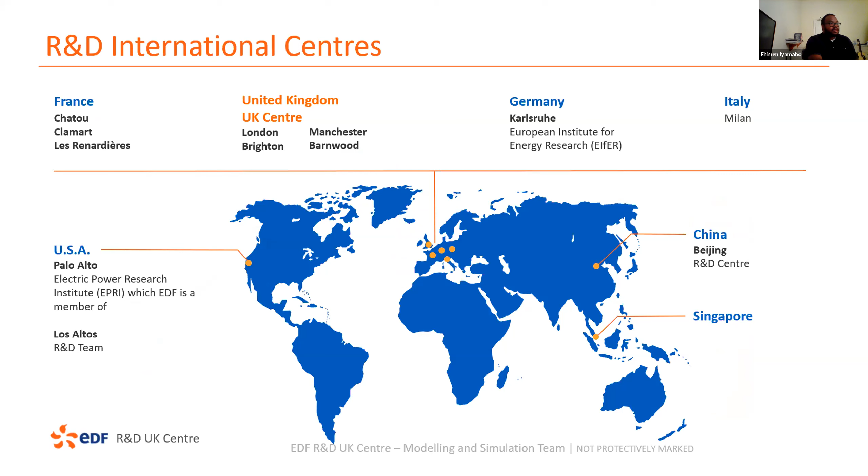This is an overview of the R&D staffing in UK Center. Overall, there are about 70 full-time researchers, with 10 based in Manchester. We support 40 PhD students overall, with 8 being supervised currently at Manchester, and we're quite diverse with about 15 nationalities. 100% of our funding is from conventional contracts to the EDF business units, of which 26% comes from corporate activities and 10% from public funding.

So, activities in the modeling and simulation team. We are in the Modeling Simulation Center at the University of Manchester. We are focused on developing high-end numerical skills in mechanical, structural, and nuclear engineering to tackle the numerous challenges in thermal hydraulics and solid mechanics stress in the nuclear industry.

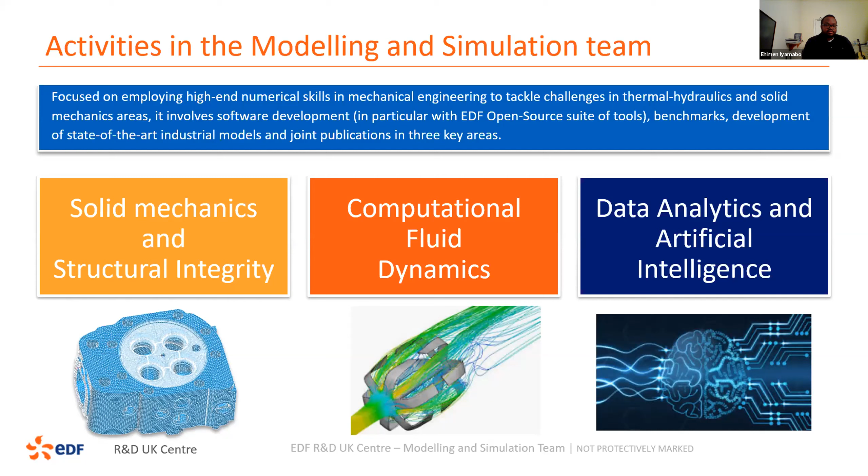It involves a lot of software development, the numerous open source codes that we have at EDF, benchmarking and the development of state-of-the-art industrial models and publications in 3 key areas: solid mechanics, structural integrity, computational fluid dynamics, and now we are increasing activities in data analytics and artificial intelligence.

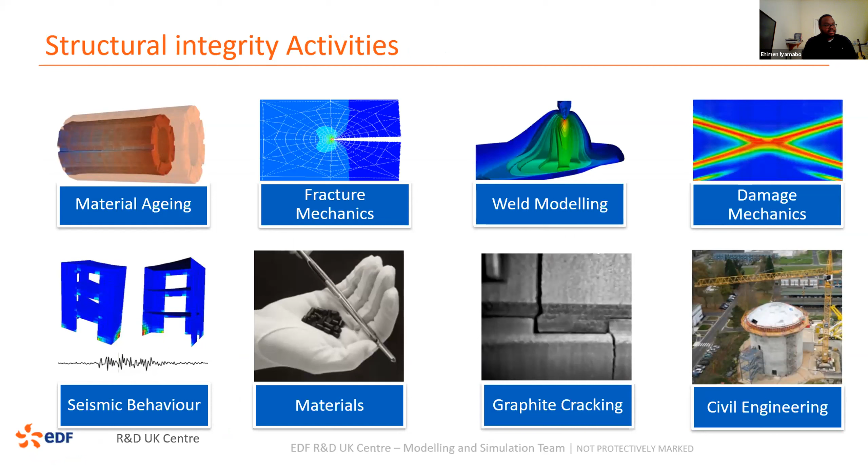In structural and integrity activities, our research focuses a lot on the studying of material aging of our AGRs, fracture mechanics and weld modelling, which we have strong collaboration on with the University of Manchester, damage mechanics and seismic behavior, materials and graphite cracking, and also we do have activities in civil engineering.

In the computational fluid dynamics, we focus a lot on finite volumes, of which we have developed a number of suites, particularly called Code_Saturne and other open source codes. We have research in free surface. We're currently expanding our research in meshless methods, which is quite relevant to us, particularly with the SPH.

At the Modeling Simulation Center, we have developed a lot of advanced turbulence models, particularly in RANS and recently for hybrid RANS-LES methods. And now we also have research into multi-phase and condensation activities.

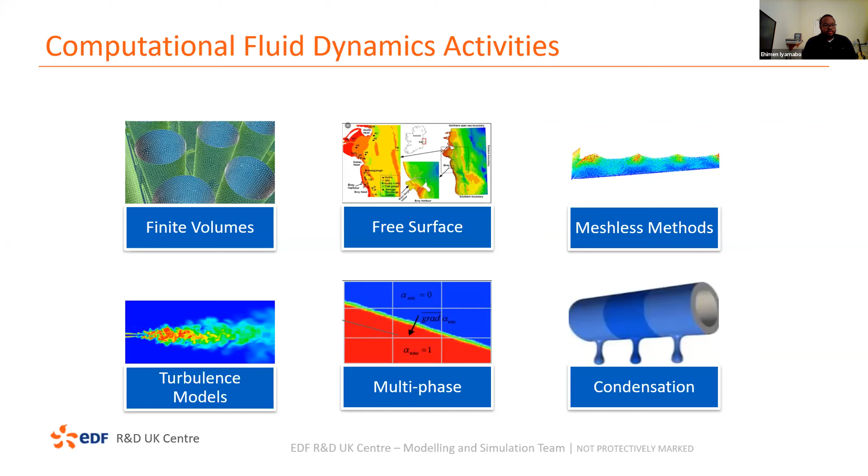Our research activities in both CFD and the structural side generate a lot of data, data from our models, our experiments, and our different investigations. Now the team is focusing on developing state-of-the-art techniques in analyzing this data and transforming it into more valuable information to enable us to make more effective decisions in the future.

Our data analytics involves data assimilation, uncertainty quantification, model reduction, and machine learning.

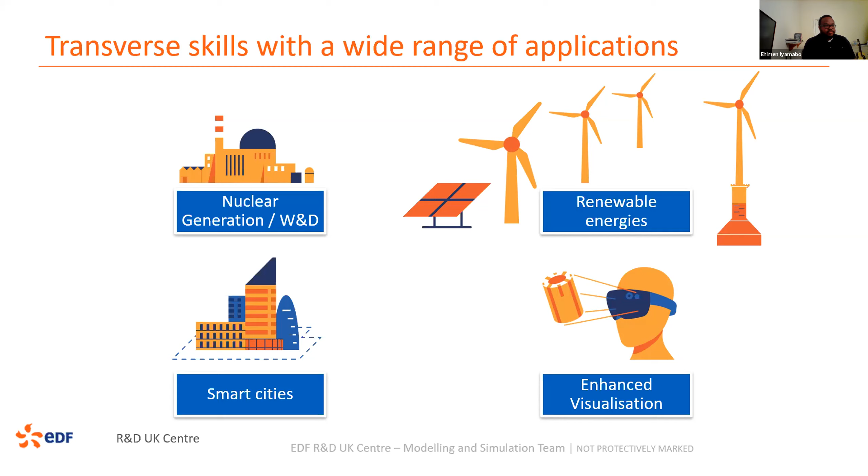The Modeling Simulation Center and the R&D group in UK has a lot of engineers with a very varied skill set, which is used to support a wide range of activities in nuclear generation and waste and decommissioning, in developing technologies in renewable energies, and also developing smart solutions or innovations in smart cities and enhanced visualization.

So I'll move on to our partnership. Our Modeling Simulation Center is split into two sides: the University of Manchester side and the EDF side. The University of Manchester side is supported by experts or staff members from the academic team at the University of Manchester, who are in charge of the supervision of PhD research and also proposals.

On the EDF side, we have about 10 permanent staff of researchers and experts, and we support a lot of interns and young engineers, developing and upskilling them. So we're active in the development of a new generation of scientists and engineers. With Manchester and EDF, we find the right balance between advanced research and industrial delivery.

We also collaborate with a number of industrial partners, including NNL and Wood.

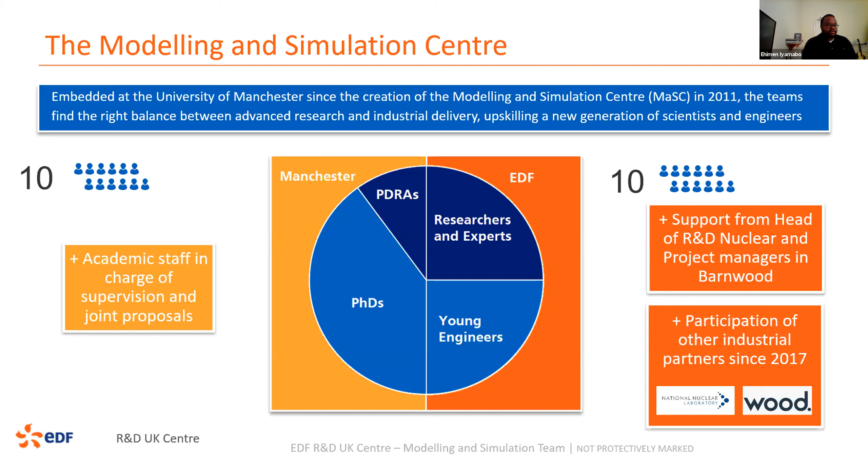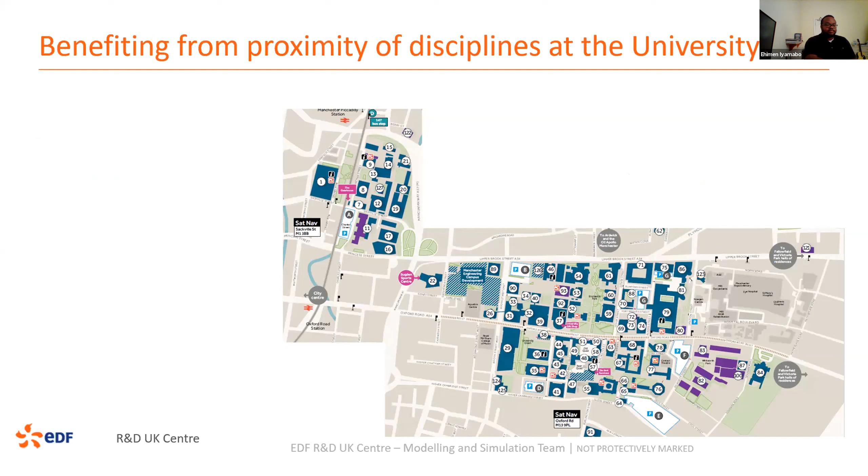As earlier mentioned, we are based at the University of Manchester, which enables us to be close to a lot of action in research in different departments, the Modelling Simulation Center, which is the home of turbulence modeling, and the Modelling Simulation Center building itself.

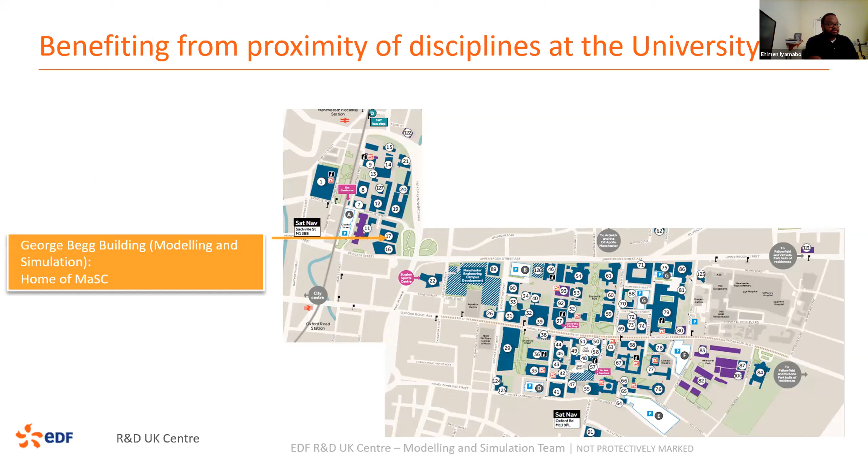I think your time runs out. Oh, okay, all right, okay. I'll just end here, and I think this is my last slide.

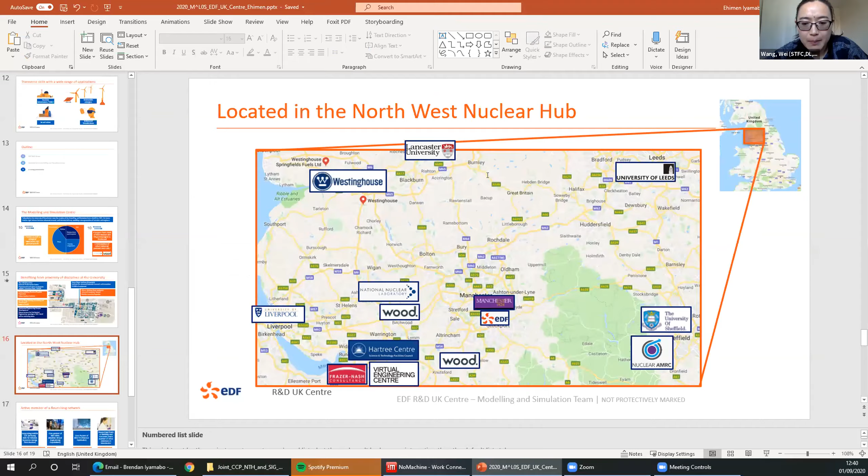Hello all. So I work for EDF. Can you hear me? Yes, you're good. So I work for EDF.

We operate the commercial nuclear reactors in the UK. So we have 14 gas-cooled reactors and 1 pressurized water reactor. That won't be the case for too much longer. The 2 reactors at Hunterston will stop operating early in 2022, which is just over 1 year from now. They are stopping due to the challenge of making a safety case from cracks in the graphite core.

Our 2 newest gas-cooled reactors, which started operating in the late 80s, so that shows you how long ago it was, will be closed in 2030, so that's 10 years from now.

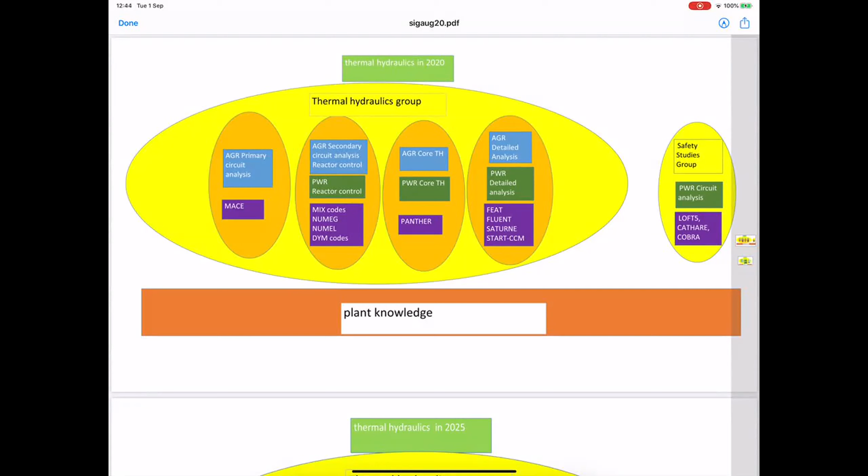In 2025, which is just 5 years' time, we're going to have to move to much more support of the PWR stations. We're going to have to carry on supporting the AGRs, but we're going to have to learn how to support the PWRs. We haven't yet decided precisely which tools we're going to be using, so some are marked with question marks, and there's certainly some things which aren't even mentioned on that slide. We're trying to define what problems we're going to have to solve, and then define which tools we're going to use, as well as carrying on supporting the AGRs.

The AGRs are those stations where we get a lot of work from, and that will definitely continue. So the problem we have is to train our existing thermal hydraulics community in the tools we will be using in 5 years' time. I think that will do for today. Thank you.

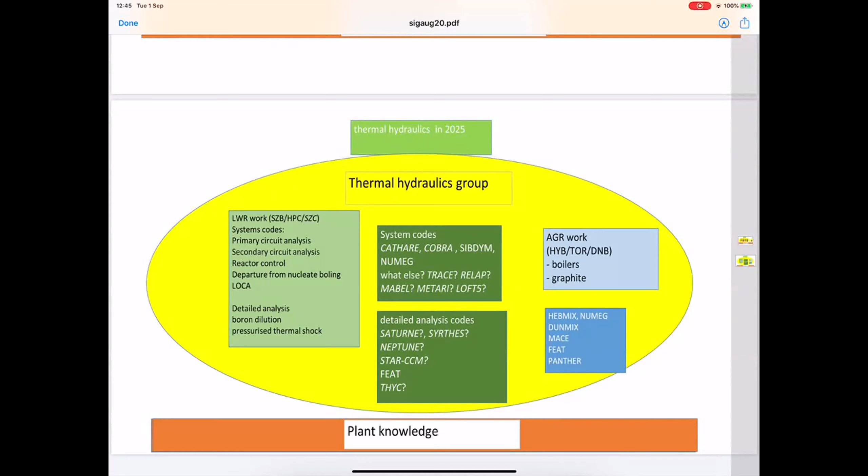Hi everyone. Unfortunately it's not been possible for us to share any slides, so I thought I'd spend a few minutes saying what our interests in this are. I'm the section lead at Rolls-Royce for computational fluid dynamics. We've got a broad interest in the wider computational thermal hydraulics discipline. We use CFD, and we also make quite extensive use of systems code for plant performance analysis.

As mentioned by Hector and Mike previously, we've got university technology centres at the University of Manchester and Imperial College London. Typically we're using CFD to model flows within components and subsystems, primarily using RANS analysis, quite often with transient boundary conditions that can be a challenge. We also do some limited LES analyses for high cycle thermal loading, and pretty much all of our CFD analysis now is in Siemens Star CCM+.

So from the CCP on the CFD front, I think what we're really interested in is improved V&V, standardized QA processes, as well as benchmarking, perhaps using high fidelity LES and DNS solutions to benchmark RANS and the like that we use more regularly in industry. One of our main challenges that we're interested in addressing partly through this CCP is improved and wider acceptance of the use of CFD in safety justifications. We're also interested in improved CFD modeling for scenarios like natural circulation and boiling, particularly at the macroscopic scale.